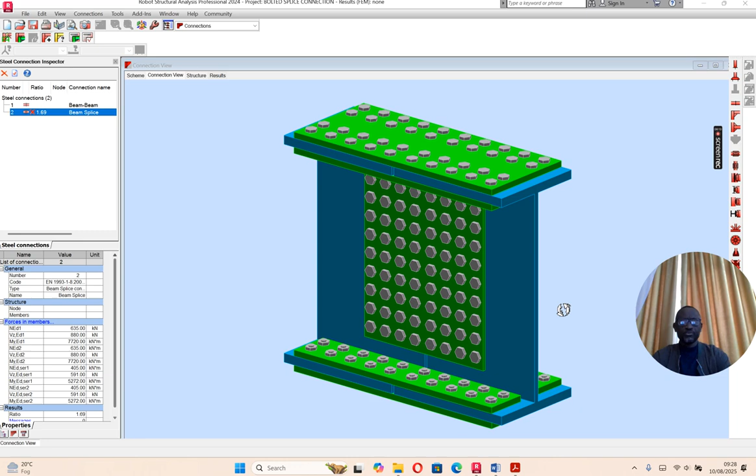So if you look at this arrangement, we have the web - this is the web plate and the web bolts. These are the flanges. In principle, if you're designing by hand, they say moments are taken by the flange or flanges, while the top and bottom flange become critical if it is simply supported, or at the bending point, and they become critical near the support and the rest of it, where there's also hogging. Then the web plate handles shear.

These handles bending, basically that is that. So this is just a 3D thing, which I'll look at in detail a bit.

There's an outer plate which goes the full width of the flange. Then you have the interior one, which you also need to note, because somewhere when you're modeling this, it will ask you. So sometimes you may not need it. In some cases, if the bending is not too much or the moment is not too much, you may not need even the upper one here. They only use the top and the bottom flange, not the interior one.

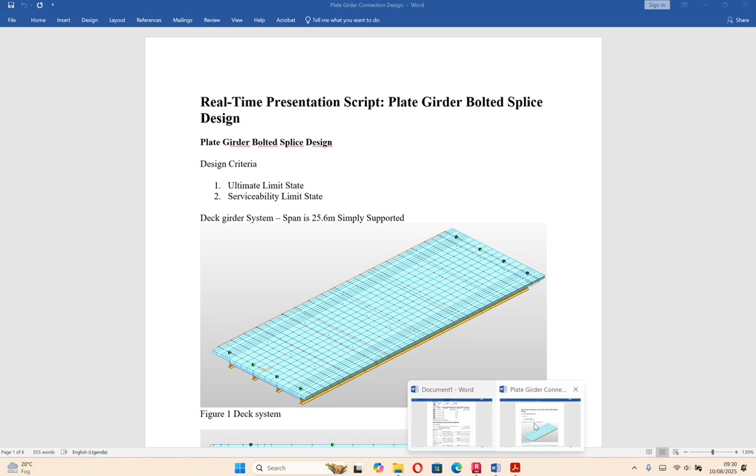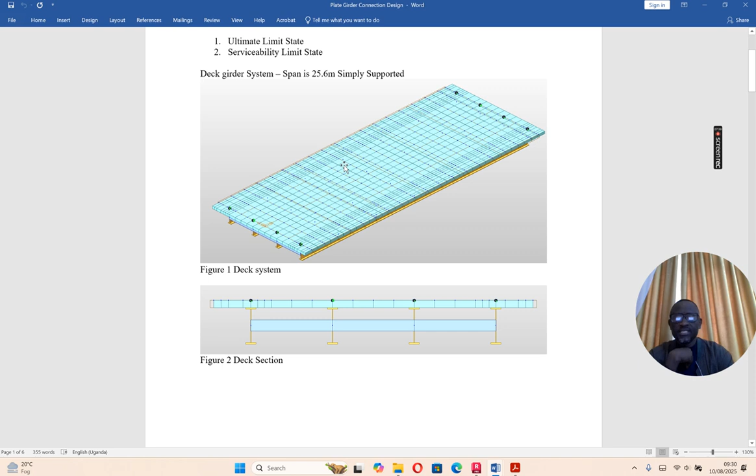So that is that. Now, where do you start from? As a designer, you have to start from somewhere. You have a deck, with about four girders. You have 1, 2, 3, 4 connected with diaphragms, and this is 3D. You do your modeling, everything is done, the span is given, and so on.

But at the end of it all, the engineer has done his design of the slab, he has done his design of the steel composite at construction stage and at service stage. Now it's left with the key one.

How do you connect a girder? If you look at the span, it's 25.6, simply supported. Now that means if your girders are coming at maybe 12 meters or 11.5, depending on the factory length, it means if it is 11.6, so what is remaining here will again remain 11.6, meaning now you are left with 14.

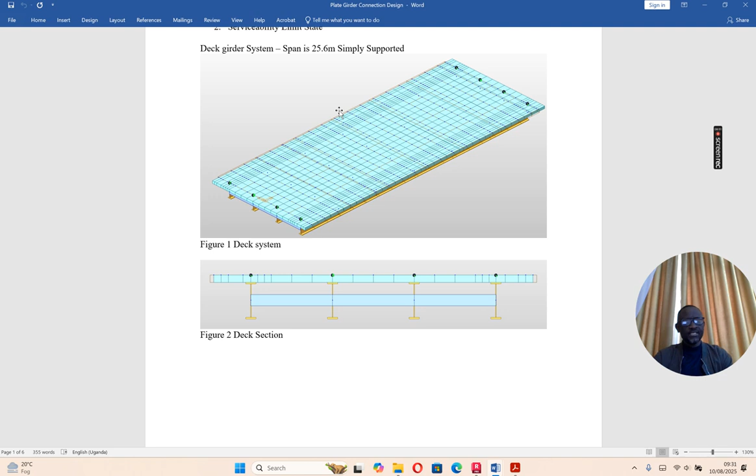14 is again more, so you have to split it, so that's about 7. So that will mean you have 7, you have 11. A full piece is 11.6, and then you split the remaining one, so you have 7. So from the support, you have a joint at 7 meters. Then from the left hand side also, from this side to this point you have support, and then there is another support. So if I come down here, you find you have something like this, somewhere around here you have 7 meters, around here you have 7 from this support.

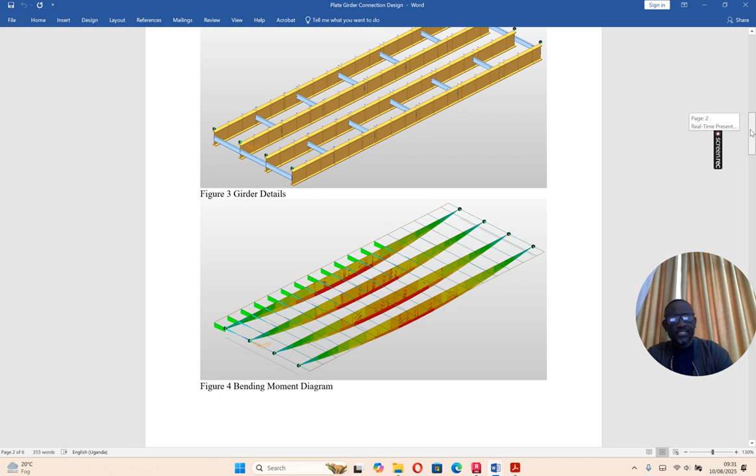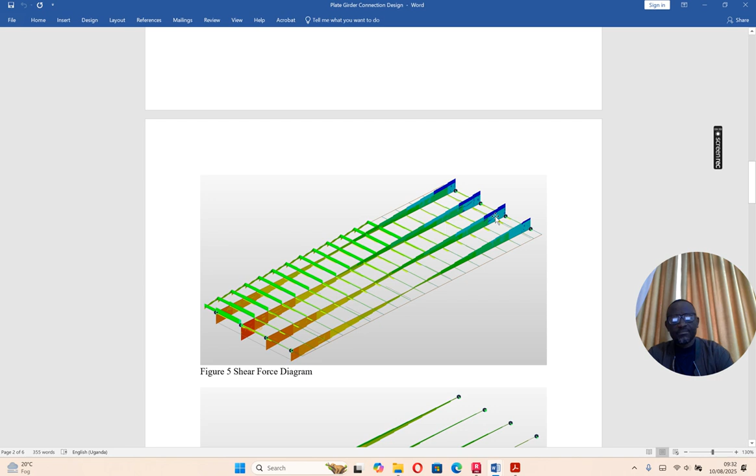So normally what happens is the principle is you have to be away from these high stress zones, you have to be away. So we normally tend to have the full piece run in the high stress zone, high bending moment, and then where there's less bending is where we put the joint. And also we need to balance with high shear, so you find from the support you have high shear, but towards the middle the shear reduces. So you try to balance that.

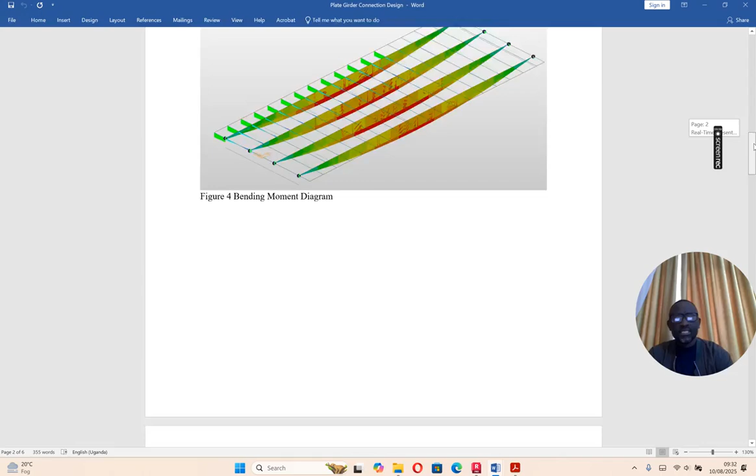But normally for the splice connection, I think there are about 3 forces we look at. We look at the bending force, we look at the shear, then we look at axial forces. Because these bolts tend to respond to axial forces, to shear forces, and to the bending forces. It's very, very important that you must be aware, and they respond at ultimate limit state as well as serviceability limit state.

For the high strength friction grip bolt, be mindful that you should not allow slip to happen at the surfaces at serviceability stage, not at the ultimate limit, but at the service limit state. Make sure the slip does not occur, because if slip occurs, then you initiate the weakness and weakening of the joint. So it is very, very important.

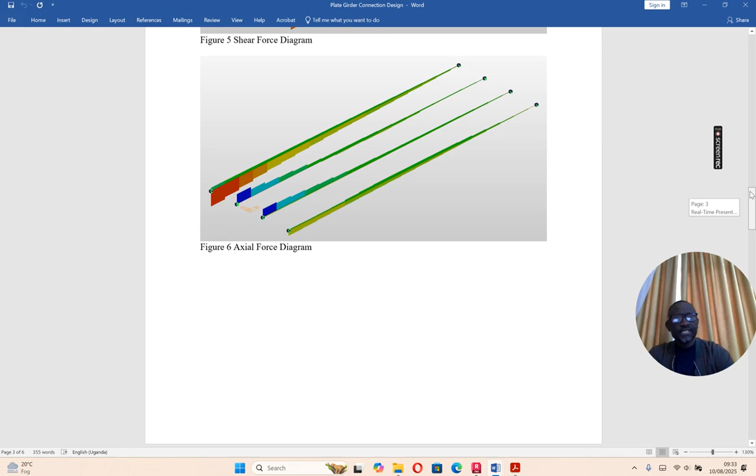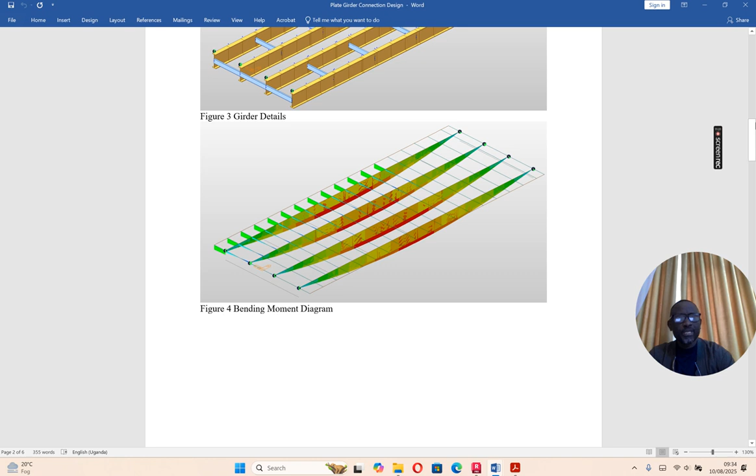So when you do your design, it is very important. At the end of it all, the engineer will extract this information from here, and then from there. Normally, when you are modeling using Midas, this is where you have to specify where the splices will be. You pick the moment exactly at the splice connection, and that information must relate to the drawing. You can't pick a 7 meter and then tomorrow say it is 7.5 or 6.5.

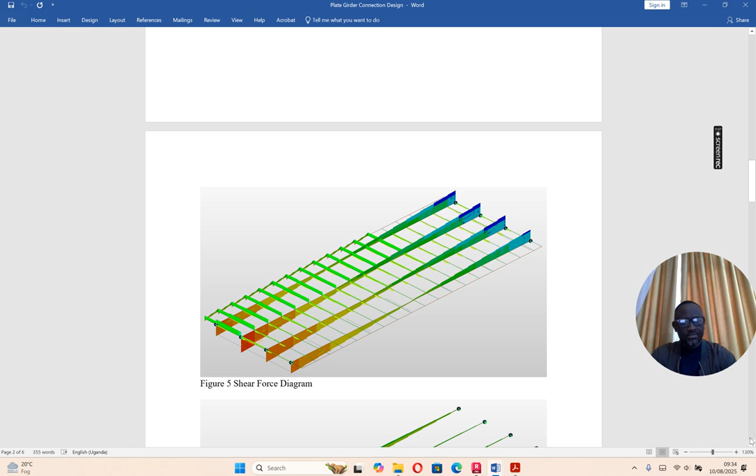So having done this, you have all that, then now we should be able. So this is the kind of typical thing that, since you're a young engineer, you have not been in this. Since this is knowledge sharing, more for the young engineers, I know you look at this, some of the bolts are here.

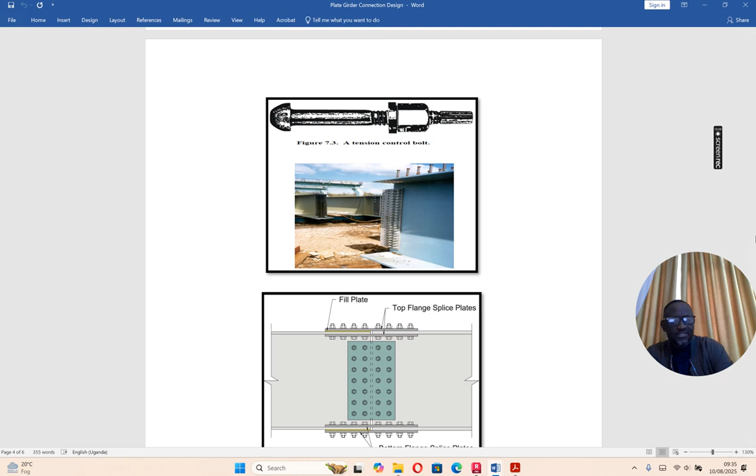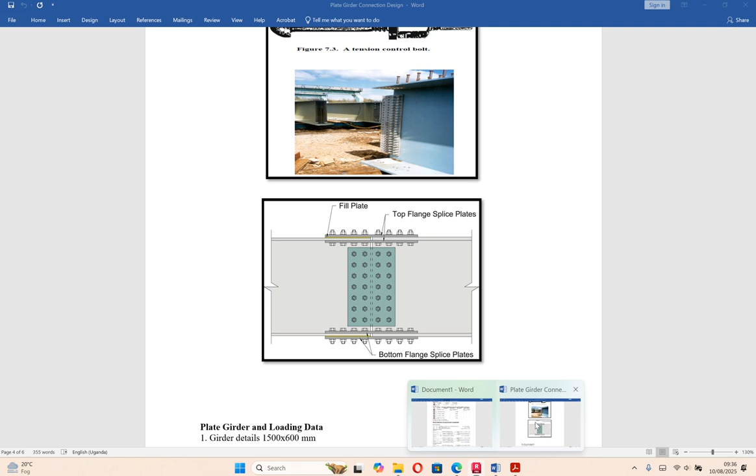So now this is a typical connection you can see, and it is not very far from what you are seeing here. Or no, I think I want a different place. I wanted this one. So this one is not different from this one, it's typically the same. So that is what needs to be done.

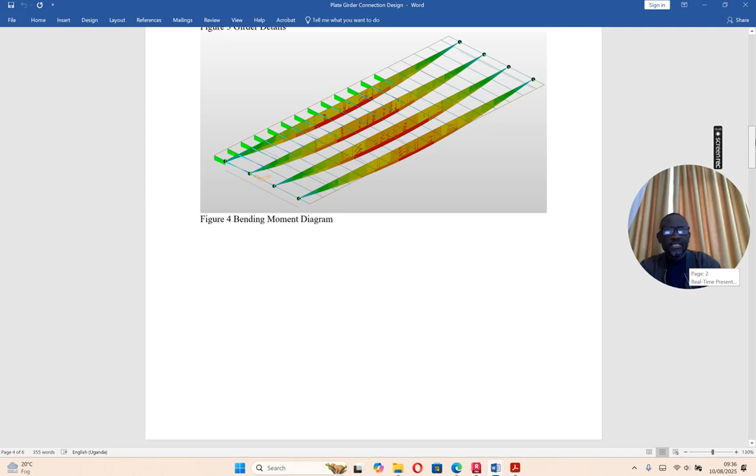I think here this layout was given as a typical, but now my point here is, where do we start from as an engineer? You start from here. When you design your thing, then you come and pick all these moments at ultimate limit state and also at serviceability limit state.

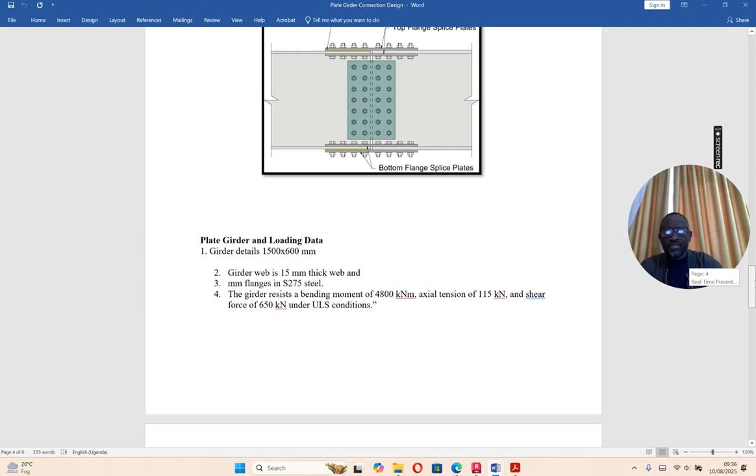Pick the moment, pick the shear, and pick the axial load. So having done that, now you have, for this one down, there was a typical plate girder, which is 1.5 meter depth by 600. That comes out from your design.

So the girder web is given a 15 mm thick web, and then the flange is in that. They've given you the girder resist bending moment of that, axial tension of that, and shear force of that. Normally from the lecture room, that's what they will give you. But now when you're a real designer, you are the one to pick.

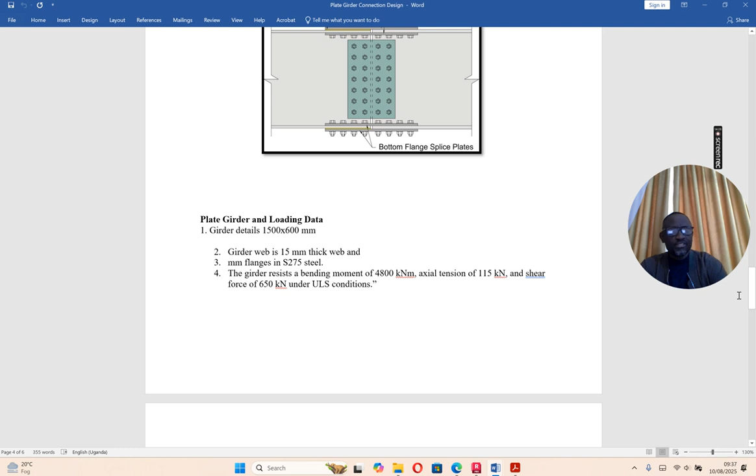You get it. So from there, this was a typical extract for lecture. For us, for lecture, this was our exercise. So you can see they picked everything here for us.

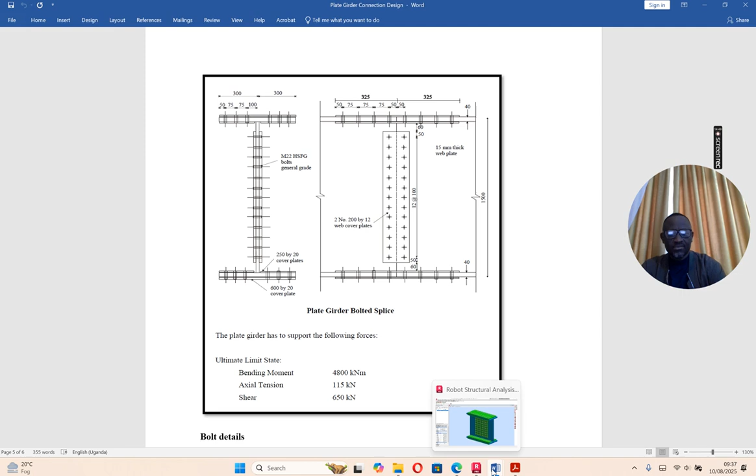If it is very deep and not too much, then you can see that actually a single line is okay. But sometimes when you do calculation, you see this one. Then you ask yourself, you see here, because it's shallow, it's only like 1 meter or 900, you need more. But if it is deeper, then you can see that one single line is good enough.

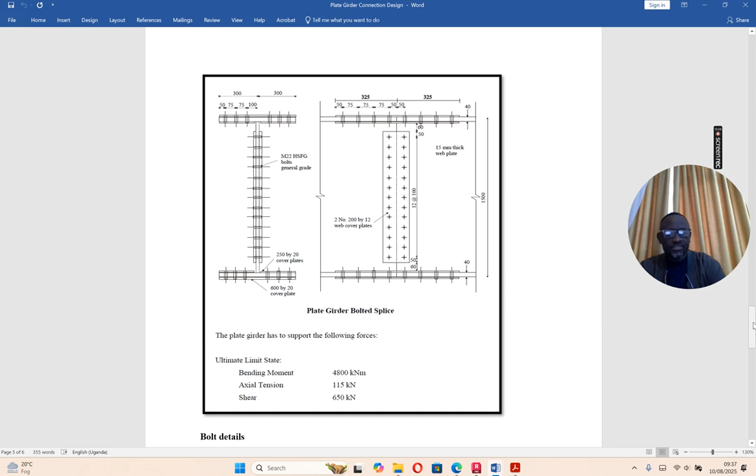So that comes up from when you are doing interactive design. So you have the ultimate limit state with given bending moment, axial loads, and shear, and basically I think this is now what normally you need. But then there are also limits, serviceability limit state moment needed to be given, forces here.

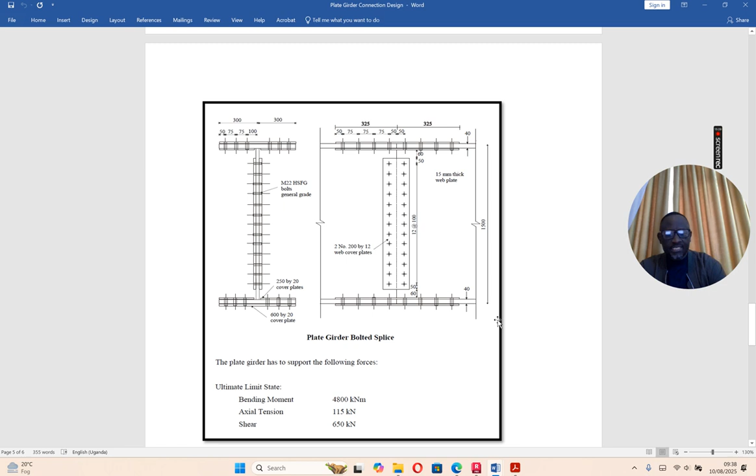So when you have all that now, what matters is for you to get to, when you come here, you are supposed to come into this. When you have opened your Robot Structural Analysis, I think there's IDEA StatiCa, but this is the one I'm using because at least it's an authenticated version, for the training and also for research.

So you have a connection details, you have to put the splice connection, beam splice is given here. Then the symmetrical connection, you can actually click. So there are different types here you pick, but for bolted connection, this is the one, because you are going to have the inner plate and the outer plate and then the web plate.

That gap, S1, is about 10 millimeters. And even these bolt holes have a gap of about 2 millimeters. You allow the steel, because steel expands and contracts, to breathe in and out to control stress. It's like if you close your mouth and nose, you get a problem - the same thing happens with steel if you don't allow for it, you see many problems coming up.

So now the girder is given here. I was using this girder on the 900, the other one I showed you was 1.5, so definitely we have less shear steel in the way. Then the grade is given, the bolt is given. Please take note of all this.

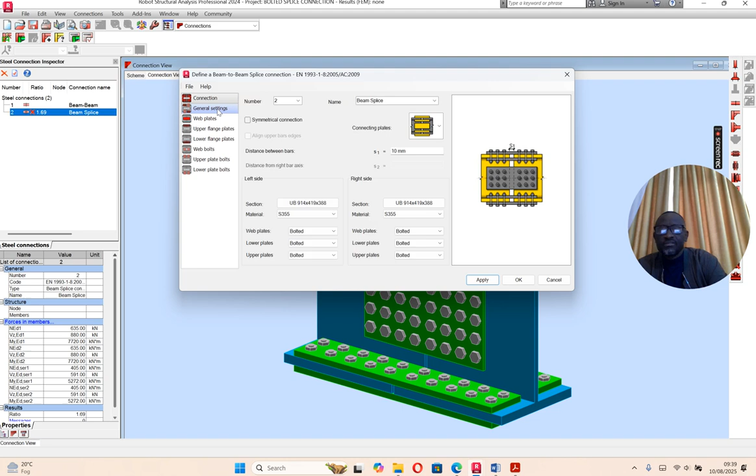Then you come to general setting. In the general setting, the same thing, the material to be used. If the materials are different, then you also specify the same setting for all.

Then here they are using M24 bolts. Normally for high strength friction grip bolts, they use a 10.9 grade bolt. The lower grade ones are normal for buildings and the rest, but for bridges, I think that is what is used. But of course you can do research and get the reason behind it - it depends, but that's what it is.

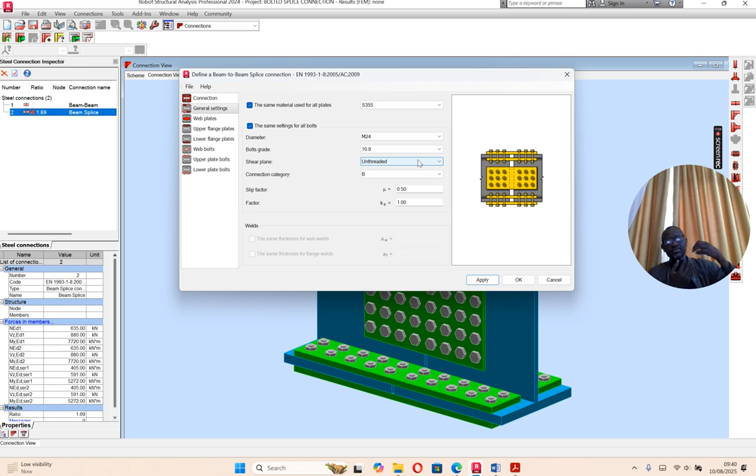So here you can either do threaded area or unthreaded, depending on where you tie the nuts - that is threaded, the area is less. When your thing is on the lower side, the area, if the bolt is M24, so the threaded area, definitely the area becomes slightly grooved, will not be the same as the shaft. So you have to be mindful of that. And then you can also check this to see whether it is threaded or unthreaded at the shear plane - one has a reduction of the area, one is not reduced.

Sometimes they bring the girders when they're galvanized, some even painted. When you paint this surface, do you still have the 0.5 slip factor? So it is very important that you take note and follow up as a supervisor, as a designer, on what special areas you need to pay attention to when they're doing the fabrications and then also installation.

Remember, for steel composite, most of this structural steel, you do factory work like shear studs. This connection detail must be done from the factory with control and high quality control deliberations, X-ray control of the welding areas and the rest. The bolt must be to precision, then they do site bolting now - that's very important. So some of these surfaces need this factor here, very important. That means the shop drawings that go to the factory for fabrication must have the slip factor given and all this detail. Very important.

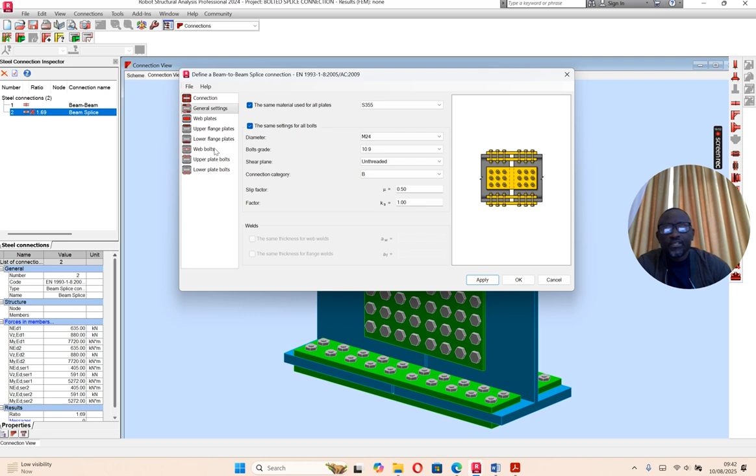So if I go back, it's okay, fine. It's the same - so you get to know the horizontal in this direction and up. Very important, that is defined all here - that is the length, the horizontal, then the depth is one. Be mindful that there should be no conflict with the flange here, it will cause a lot of problem. And then the thickness is always given.

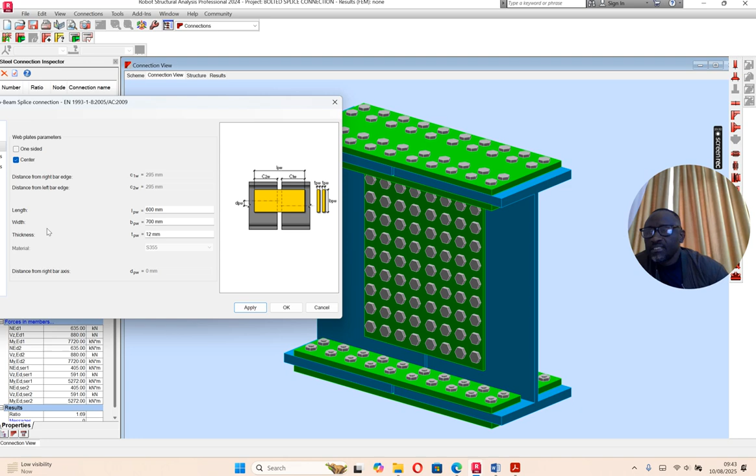Now after that, then you are done with the web detail, only for the flange - the bolts will come later. Then you go to the upper flange. Here also the length is given, you see even here is given the width as per the flange. Sometimes it is reduced inward, and then also the length.

You specify that, and then the thickness also you have to specify. It may not necessarily be the same thickness that the force will give you. Then the internal plate parameter, that's the one - these are the internal plate parameters. So you reduce this thickness from the top, deduct it, and allow some allowance because there will be a weld here, maybe 6, 7, 8, 9, or 10. You deduct it, allow that to fit well, and we shall also look at the spacing requirement later.

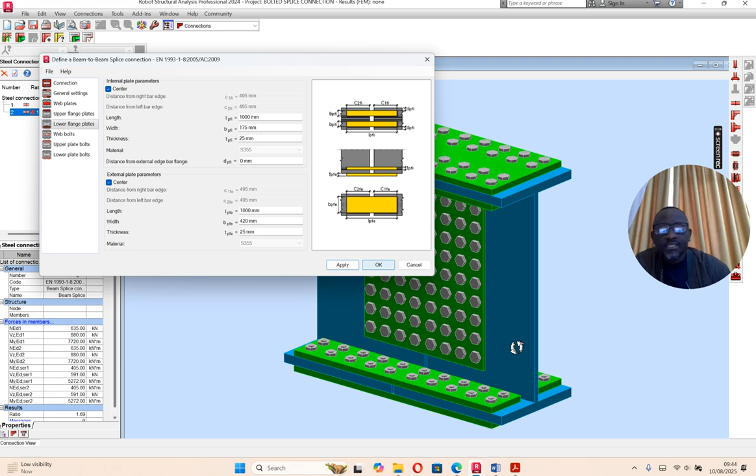So you specify that. Then the lower flange is the same thing - you now know this one here, it's the same as up here, just like a replica. But one thing you need to know here is, if it is simply supported, sometimes this flange can be longer than that, and the bolts here can be more or less than this one. So that is something you need to know.

Very, very important. And then the web bolt now is very important. Now you need to know basically the spacing, the rows. It is iterative - most of this design we do, you first start with a single line, then move to the double line. You'll see the results coming until you get what works.

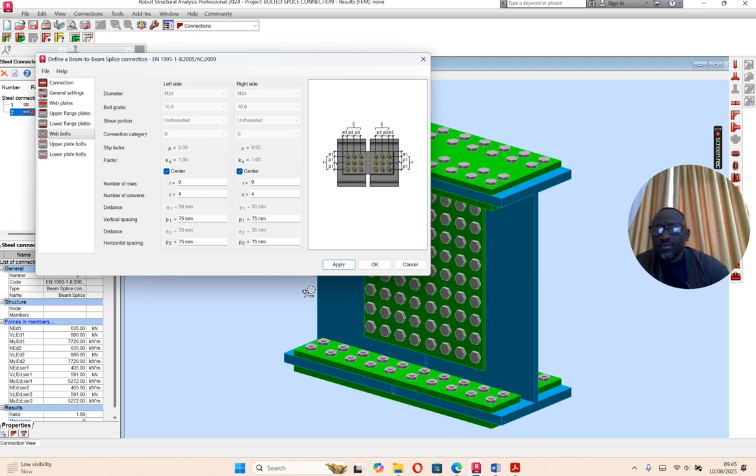So the spacings are all given - what you need to know is the rows, the columns, so we are going to see the requirement of E1, E2, and P1 and P2. They are all specified here. Even the upper plate flange, the E1, E2, and so on - those requirements are code guided. What would be the minimum spacing of bolts?

The same principle applies if you're doing piling - the way you do piling is the same way you do the bolting. The minimum edge distance for piling is 1D. If the diameter is 1 meter, then the minimum edge distance from the edge of the pile cap is 1 meter to the center. That is what it is. But I think we shall see how the bolt is done.

So for the hole here, you have the number of columns... but this is not exactly this one, this is now entering another one. The number of columns here are 1, 2, 3, 4. Because it's symmetric, it will replicate on the other side, so 4. And the rows are 1, 2, 3, 4, 5, 6, 7, 8, 9. So that's how you get it.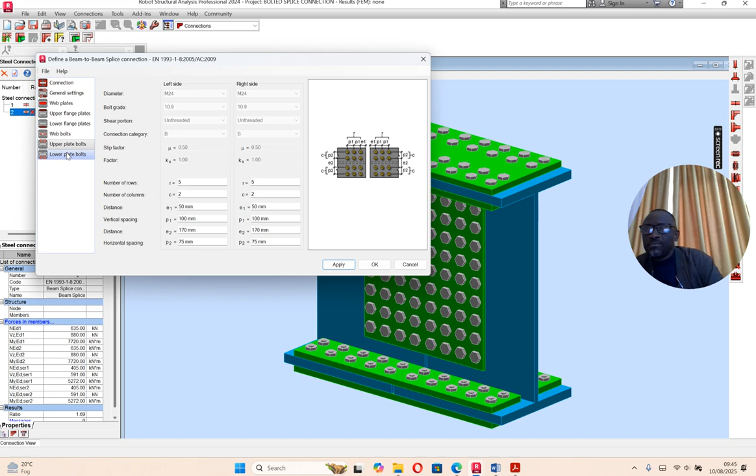So from here, the lower plate you do the same. Having done all this, the next stage is to go to the forces. These forces are where now you pick - I told you, you see axial force, shear force, bending.

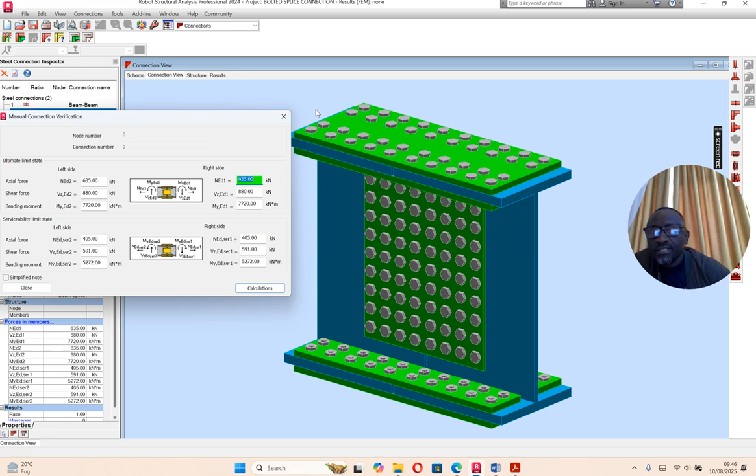That's the ultimate limit - the right hand side, the left hand side. Remember, this thing has both the right hand side and left hand side separated by that gap of 10 millimeters. So the loading, you can see even the nomenclature of the loading, you can see it all here. Very important - go back to your theory of structures.

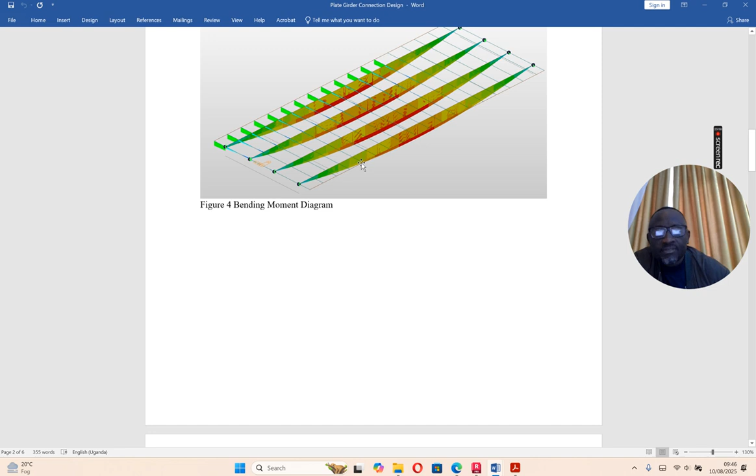So these are typical values they have given, but you will have to pick from where you did this one - you would go back here and pick them. The typical values you would pick from here: what is the value around here for the bending moment? What is the value at the shear? Get the right one, and make sure you know the worst combination is what you're going to be using.

So having done that, for ultimate you specify all of them here, left hand - this is typical here. Then serviceability limit state also here and there. Please, for most of these forces you have the ultimate limit state output and then serviceability - make sure they're all here.

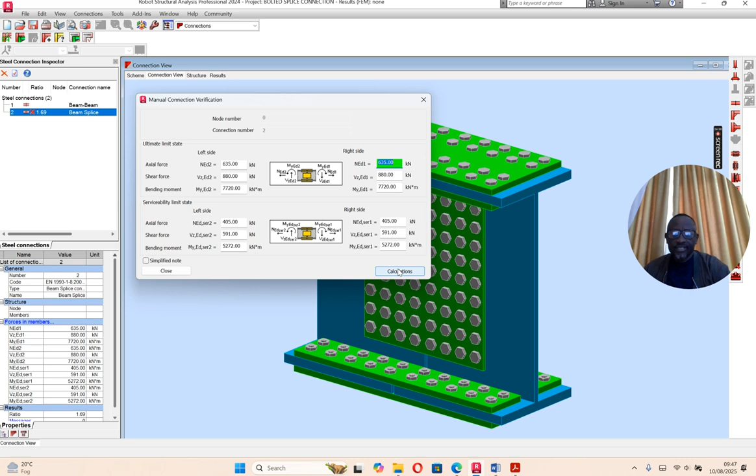Then when you click calculation, it will take you through - having done all this, first the geometry. When you're done with all the geometry, now you go to the force. So you click here, and it's going to run the design. So the design is out.

It's telling you it has failed, the ratio has gone above 1. So your ratio must be less than 1. Now it is from here that you start: what happened, why has it failed?

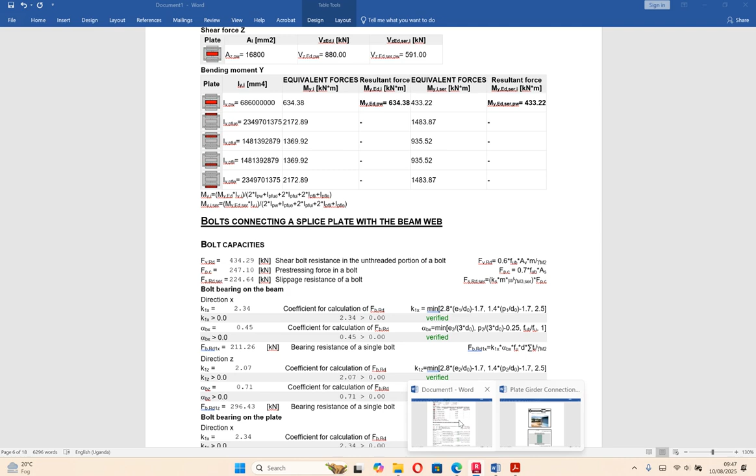There is already an output somewhere here that I needed to share with you, so that will be the output. You can use what is typical here. Now he's telling you the calculation of the beam to beam splice connection. The Eurocode is given, Robot Structure is given. These are the different geometries, the way you see it.

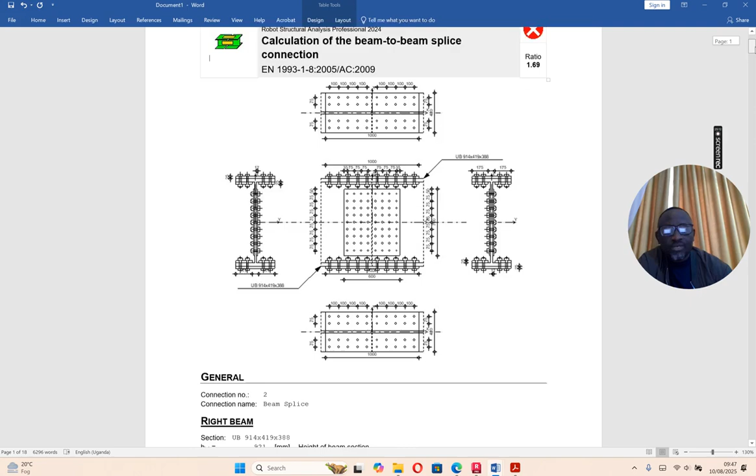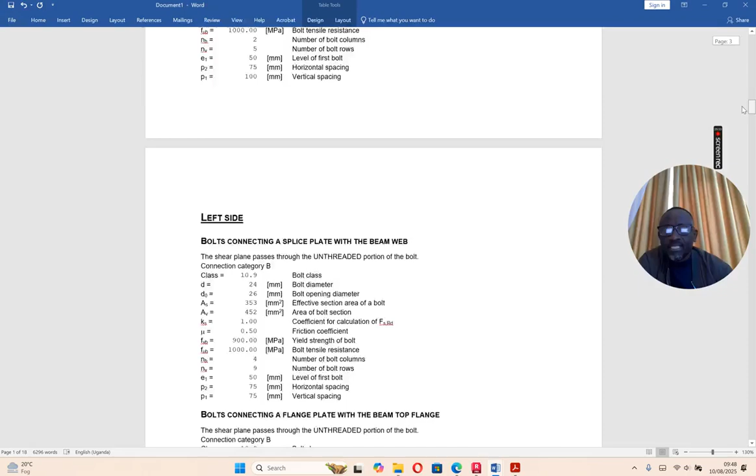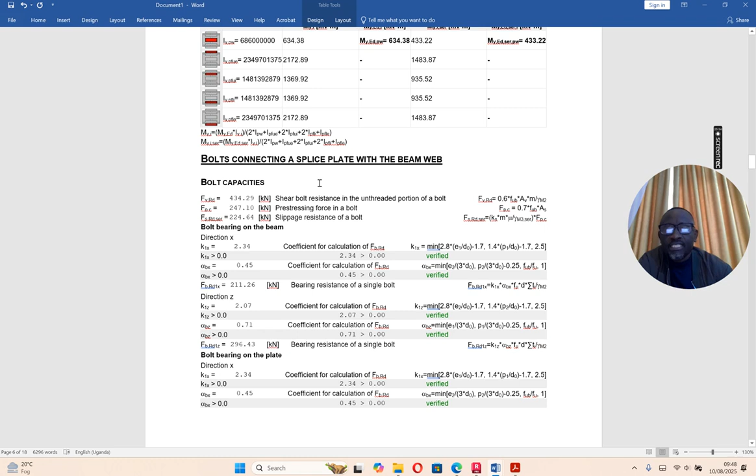Then now you want to know why it has failed. Where it has passed, it will give you verified upper plate. These are the dimensions, all of them, dimension detail, labeling, and then parameters. So we now output starting from material factors given. Now these are all what you were specifying one by one. At the end, where it is said verified means they have all passed. Bolt connecting a splice plate with the beam, where bolt capacity, I think they have all passed.

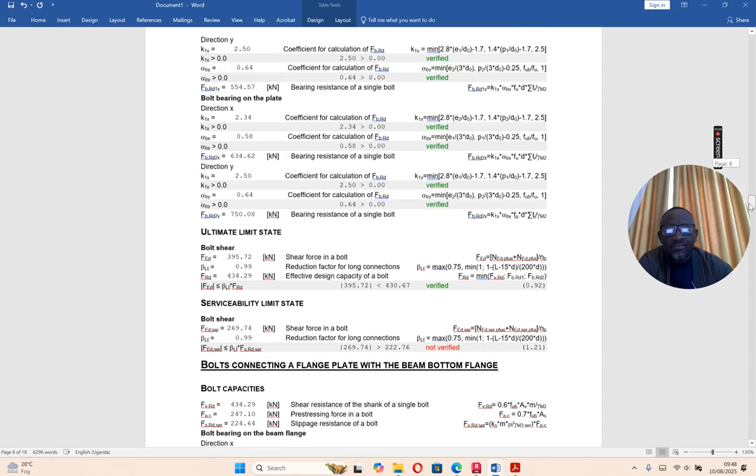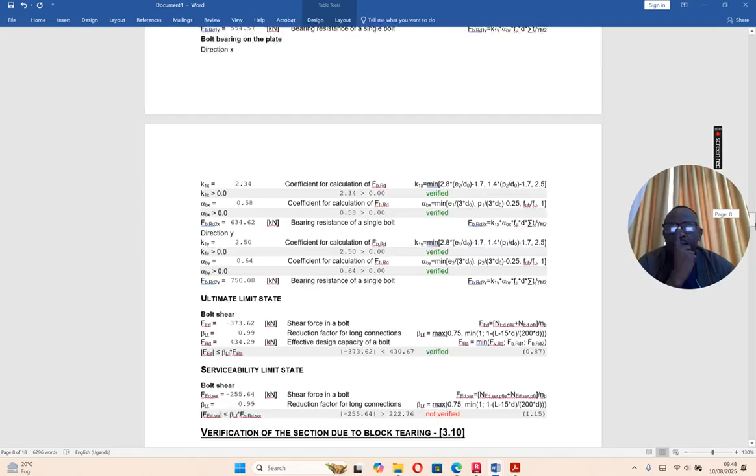Ultimate limit state, bolt shear, all passed. Bolt connecting a flange, they're all okay, verified. First rate, serviceability limit state, bolt shear, problem. You look again, come down. So shear into the bolt is a trouble. Serviceability limit state, bolt shear, not verified, means it has failed.

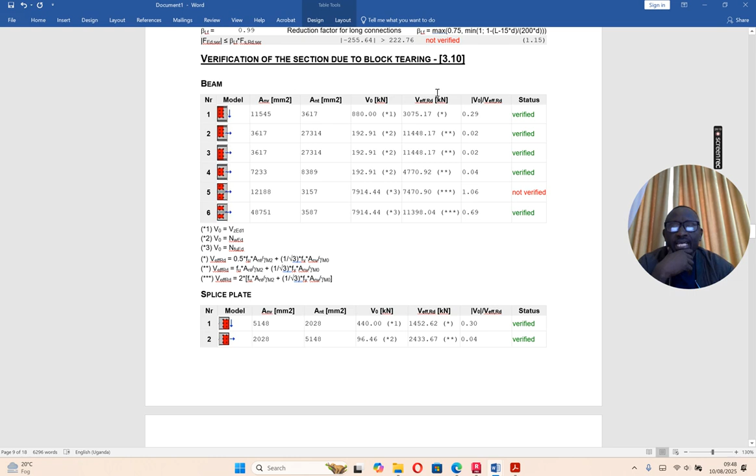You can see a factor here. The load, this is it, this is applied, it is more than the capacity. Then you come again down: verification of section due to block tearing. Still down here, you have a problem of the beam. So the beam also has a problem.

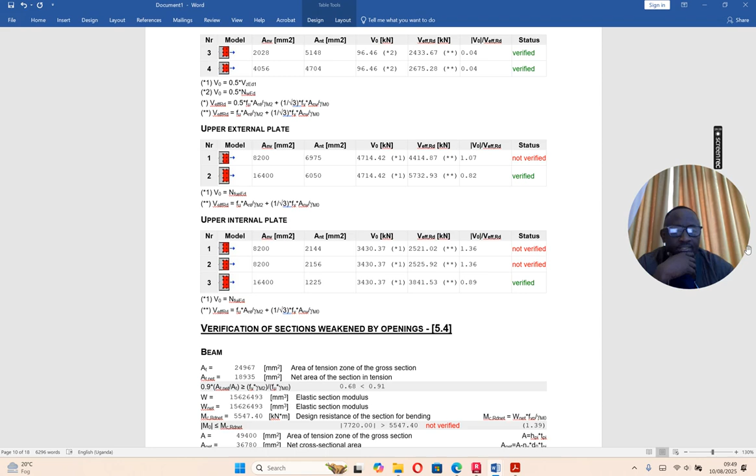You get it? So it can either be a plate. The upper external plate has a problem. The upper internal plate has a problem. And then, so you begin - that's now your first iteration. You're going to go and check what is it - is it the thickness, is it the what?

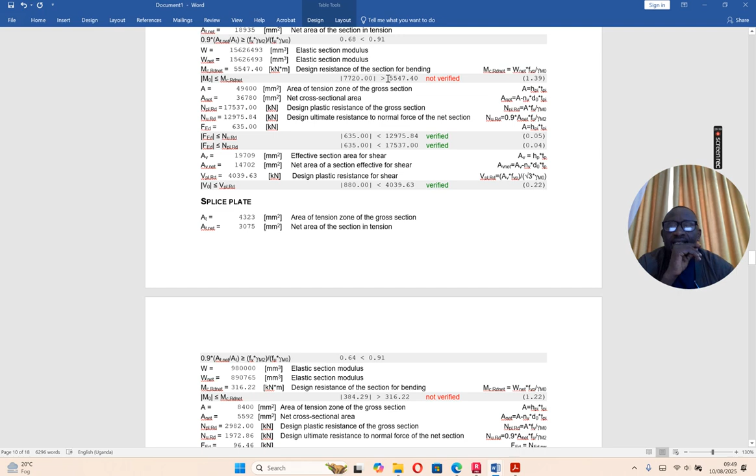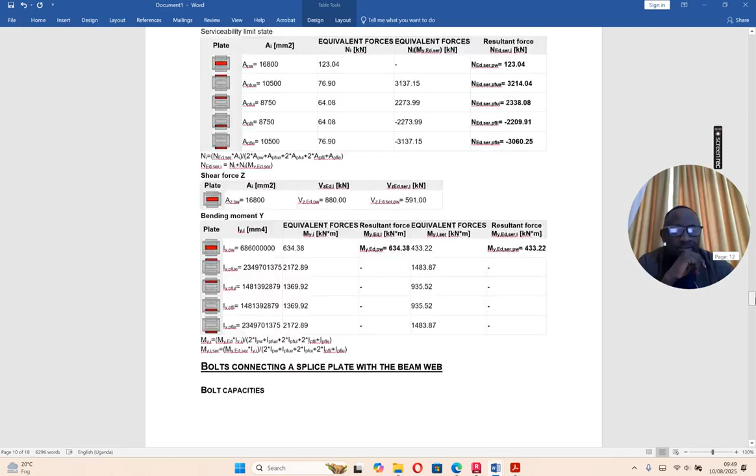You see here, the forces are not meeting - here the applied are less than resistance, but here now, so these are the actual stuff. So this is what you look at now, you see most of this upper plate, they're all failing, and you need to know area of tension zone, blah blah. So all down, so finally down you see it is saying connection does not conform to the code.

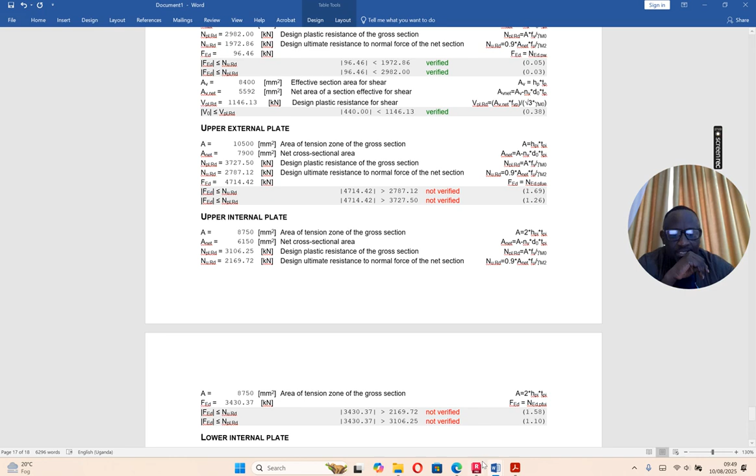It has failed, so you go back. When you go back for the iteration, you start - so that is the most important thing. You would go and try to see that maybe it is the depth that you need to improve, or the thickness of this, or the web. You have to keep zigzagging here, doing iterative, and you run until you get that.

Very, very important, something I wanted to share with you here. So I'm going to look at the requirement of the bolts and the shear. Definitely the splice connection is designed in accordance with the EN 19 blah blah. These are the references you take for bolt connection, bending, shear, and axial forces.

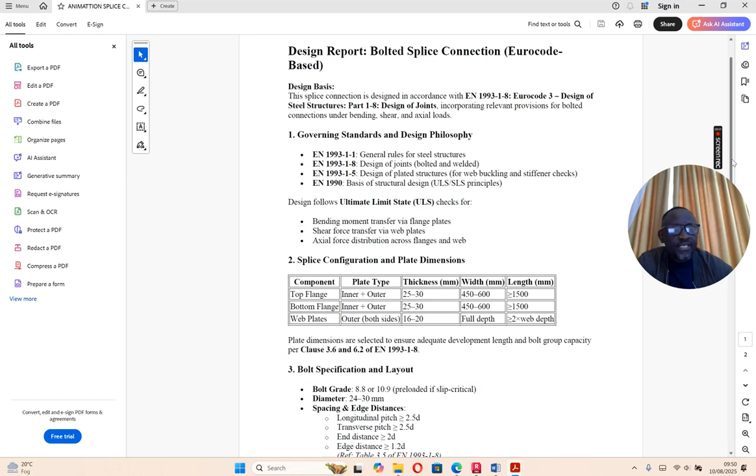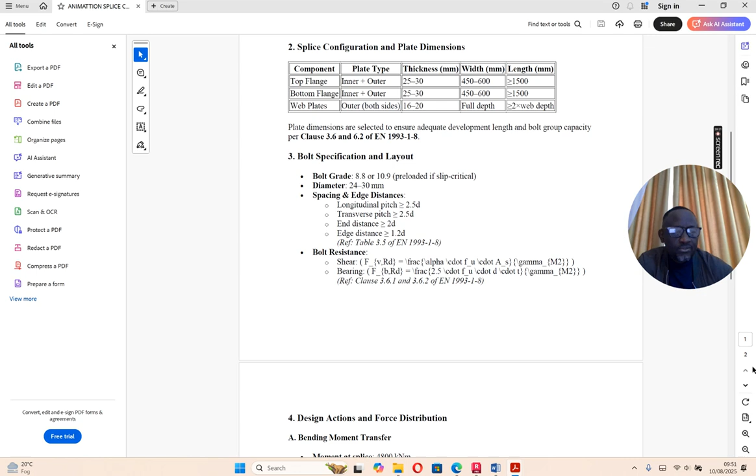So what is happening here is, for bolt grade 8.8 or 10.9, preloaded if slip is critical. Preloaded bolts are for high strength friction grip bolts. Diameter, they give you spacing. This is what I want us to be mindful of - the spacing here. You see bolt specification and layout.

Spacing and edge distance: for longitudinal pitch, that is the spacing, interior spacing, which is here, in anything in this direction, and also in between here in this direction, and also here, interior. They're saying it has to be at least 2.5D. If the bolt is 20 millimeter diameter, that means our minimum spacing should be 50. Transverse also the same, should be at least 50 for a 20 millimeter diameter, or 30. If it is 30, it should be at least 75. If it is 24, it's around there, about 65 or something.

Then end distance, they're saying at least greater than 2D, while the edge distance will be about 1.2D. This is EN, but if it is Eurocode, it would be about 1.2. No, if it is BS, I think 1.25.

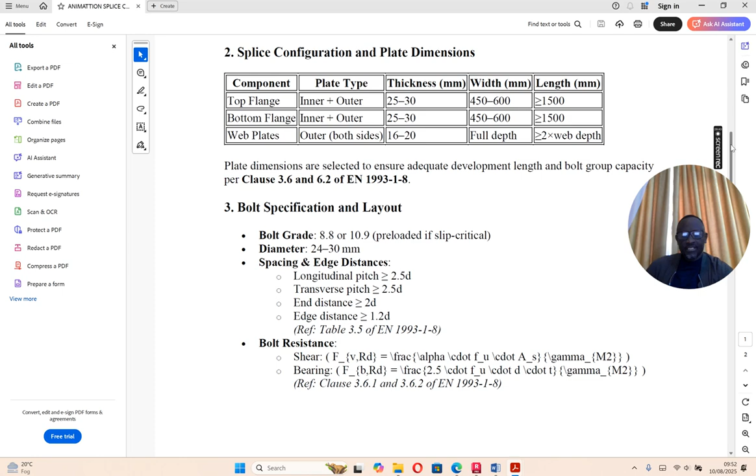You can look at the different codes, but whichever code you're applying, make sure the spacing isn't random. Normally, even when they submit this report to you, you check it, it should not be random. It should comply, with reference given for EN. You can check the reference given. That is what I wanted in this spacing.

The rest now, in terms of the bending, I told you about the lever arm. For those who do calculation by hand, it's very important when the moment is given, you need to know the center of the top flange and the center of the bottom flange is the lever arm you get. Then dividing it, you get the force acting on the bolts.

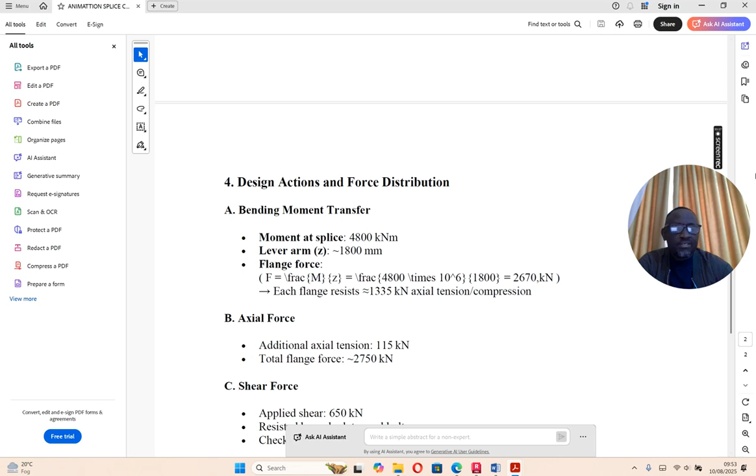From there you add a few things, I think they're all given. The axial load is the horizontal force that will cause this bolt to fail. Then you start calculating how many bolts you need. I don't want to go into more detail because they're all given, but at least you should know the procedure.

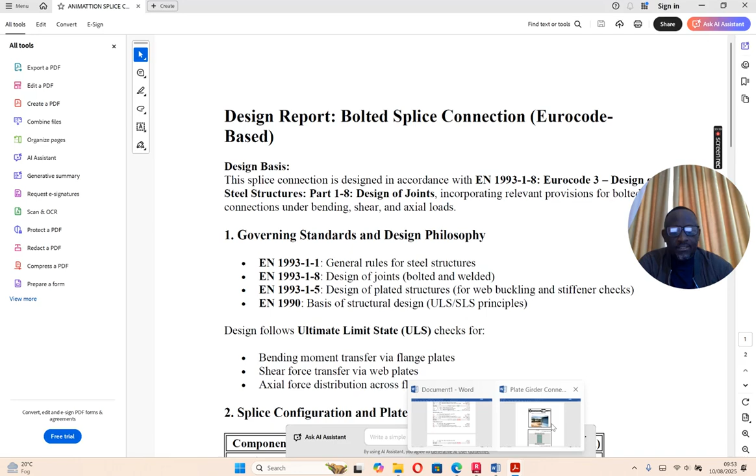And how to follow it. So once you get your force right, you do your calculation right, you pick the right moment. Please, normally people make mistakes, they end up picking the moment here. You'll be in trouble. You must know that these girders are not full length all the way.

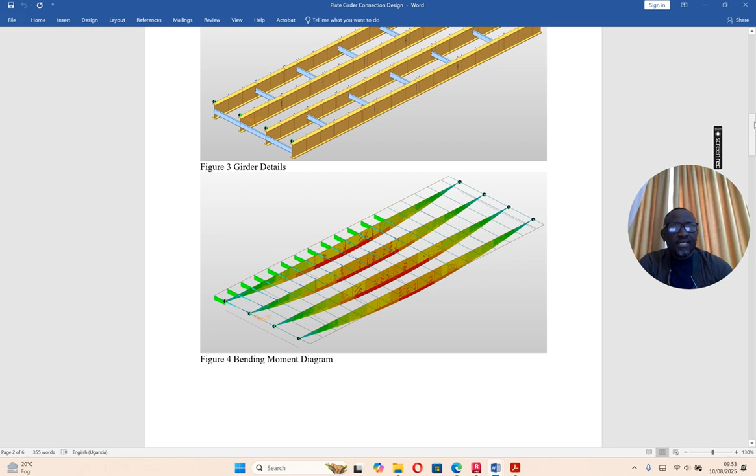Even if it is full length, you can't design a bolt around here. You're going to have a 2 meter deep, even 3 meter deep section, and you're going to have millions of bolts. So you have to pick them from this side, and then you're able to pick the right shear, the axial load, and the right configurations and dimensions.

You specify and the drawings will come out. Your drawing must also comply with the spacing of the bolt, minimum end distance, minimum edge distance, and the minimum you do that. If the minimum is not passing, then your iteration comes in. You adjust, add more bolts, add more plate, lengthen the plate, or deepen the girder. So I think that is basically what I thought I should share with you.

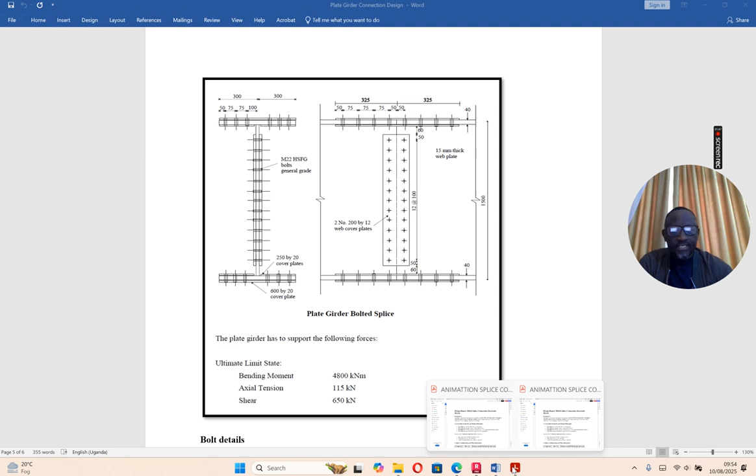So once you get that one, please, this is a very good thing. Also, I realize I've been talking too much about Midas. Now I think Midas also has its own limitations, especially in the connection details, joints, base plates, and other things. So here is where you come in and try to work.

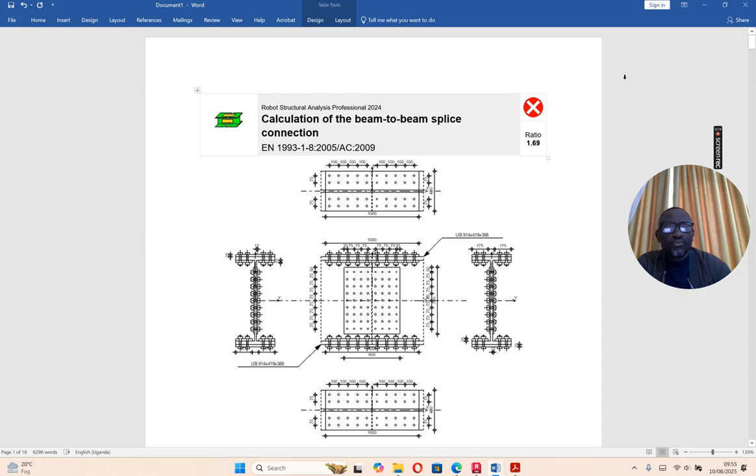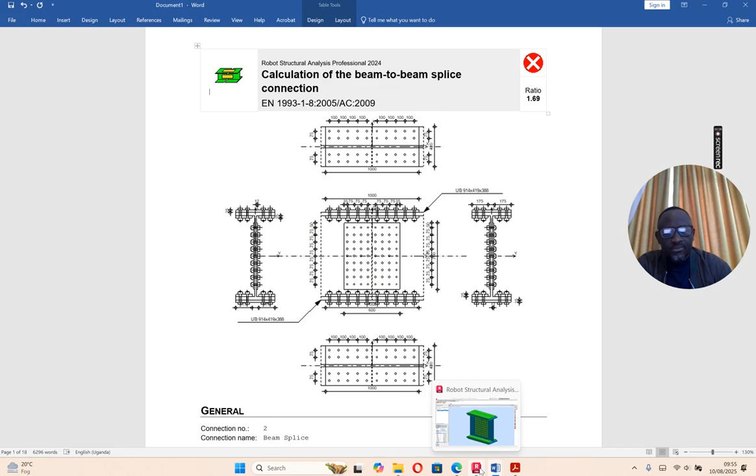Make sure this is not failing. If it is failing, please check all this verification which I've given you. The ratios must all be green. Then from there you should be able to smile at the end of your design.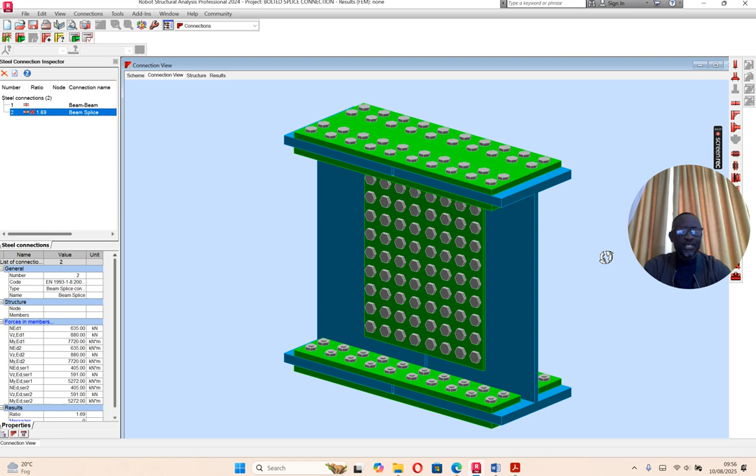So I urge you, the young guys, work hard. I don't have a PhD, but I want you guys to get yours. Me, I don't need that one, I just learn a few structures. So I think this is okay. Mr. Odinga, please, you can have this.